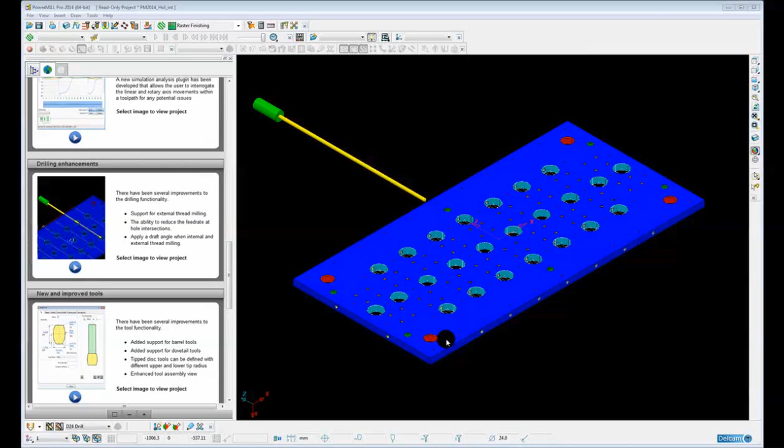There have been several enhancements to the drilling functionality in PowerMill 2014. Included in these enhancements are support for external thread milling using a thread milling tool, the ability now to apply draft to a threaded boss or a threaded hole, and finally the ability to reduce the feed rate when the drill breaks through an intersecting hole. This is particularly useful when gun drilling with small diameter, very long drills.

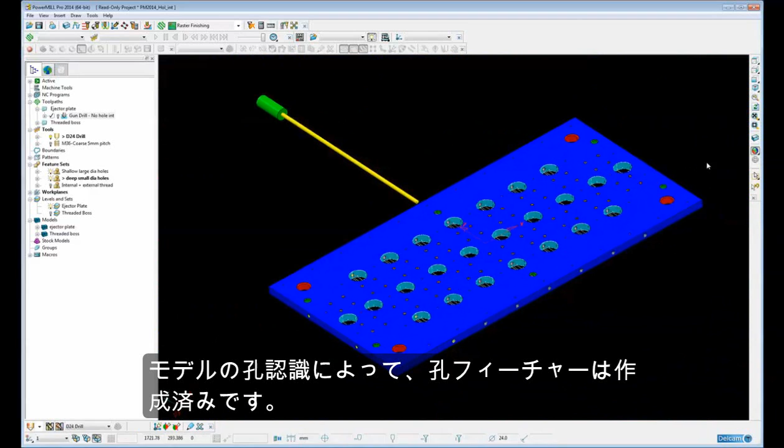Let's have a look at this list of new functionality in this example project. First of all, we're going to look at varying the feed rate at hole intersections. So here we have an example of a mold tool plate, an ejector plate, and we have a series of holes, smaller holes that intersect larger holes. We've already created the hole features by simply recognizing the holes in the model.

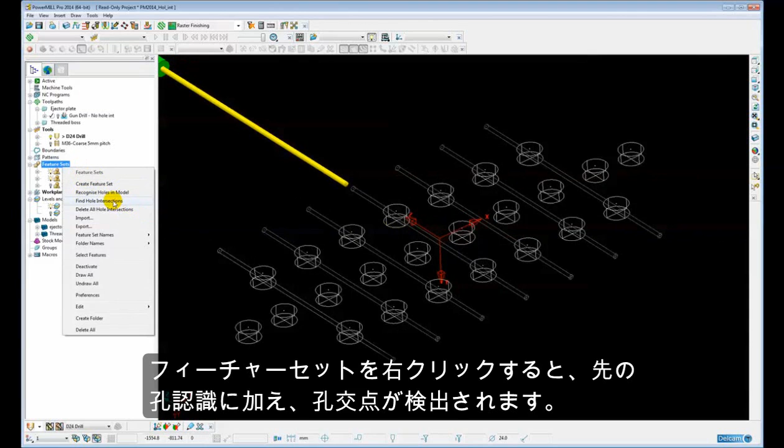Now, before we can apply the varying feed rate at the hole intersections, we need to find all intersections of all holes in PowerMill. This is a simple operation. We simply right click on the feature set. In addition to where we have recognize holes in model, we also have find hole intersections. So this will scan through all the holes and identify and display all the hole intersections. So here we can see the hole features are displayed with the hole intersections.

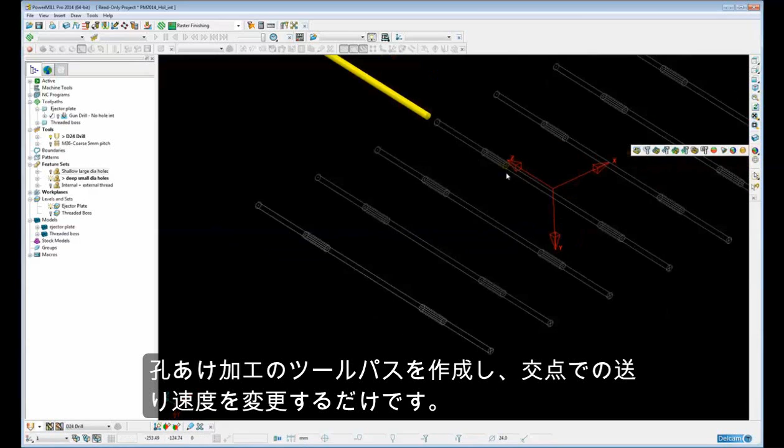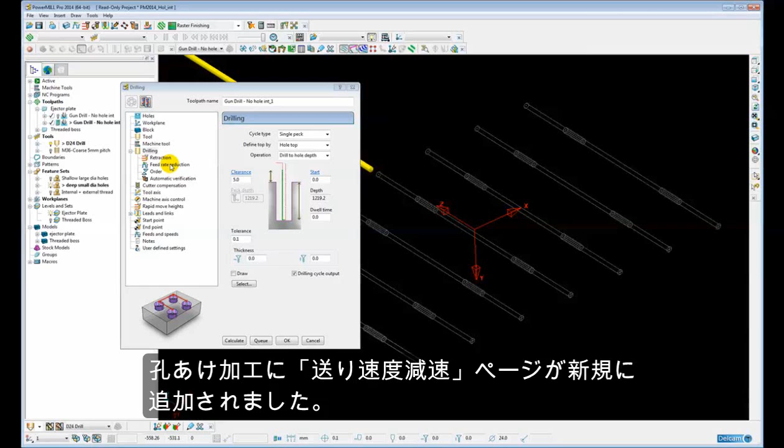So now it's simply a case of creating our drilling toolpath and activating the various feed rates at the intersection points. So I have a toolpath already created. If I go to settings, simply clone that toolpath. So just to show you how we vary the hole feed rates, we're going to create a single peck, drill hole to depth. Now you'll notice there's a new page on the drilling form called feed rate reduction.

So we're going to reduce the feed rate at hole intersections. Now I want the feed rate to be fully reduced at least 5 millimeters before the actual intersection of the hole, and I want the overall distance for the feed rate reduction to start to be, say, 20 millimeters. So from 20 millimeters to 5 millimeters, that's when the feed rate will be reduced, and I want to do that in 4 steps.

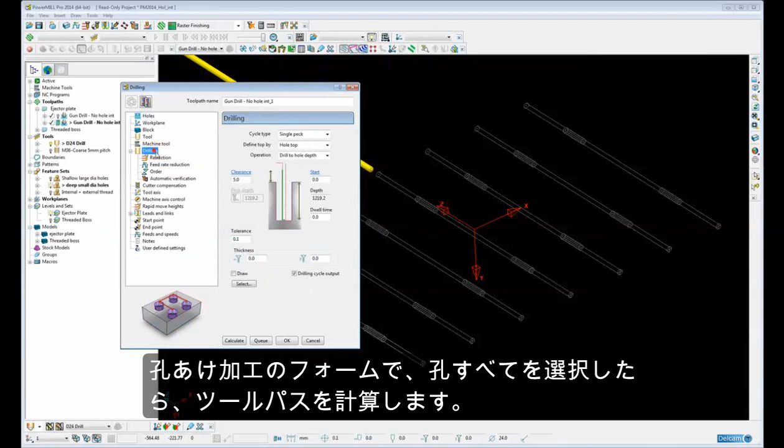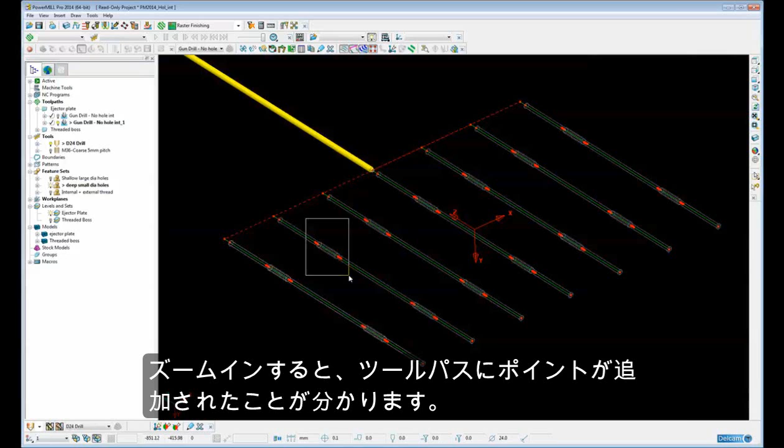And I want the final feed rate to be 30% of the general feed rate, and I want the spindle speed to be 50% of the general spindle speed. So if we go back to our drilling form and select all our holes, and then simply calculate the toolpath. So obviously the toolpath doesn't look any different until we switch on the draw points. And then if we zoom in, we can see it's added in extra points within the toolpath.

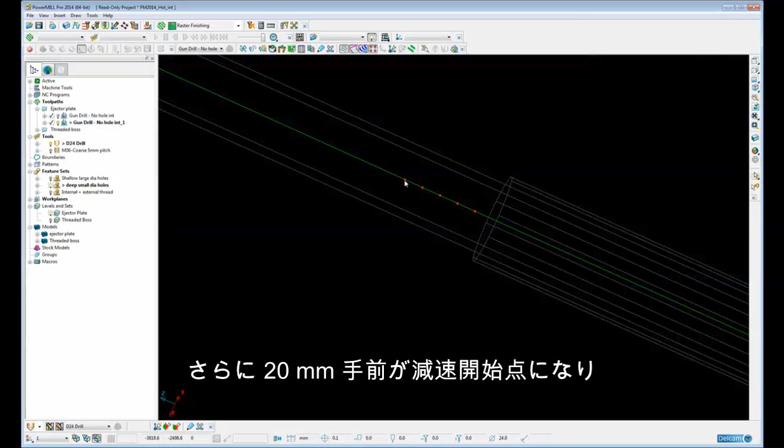So here we see at 5 millimeters before the intersection, the feed rate will be fully reduced, and an extra 20 millimeters on top of the 5 millimeters is when the feed rate will start to be reduced, and the feed rate has been reduced in 4 increments. If we want to, we can use the drawing option, draw feeds, and then we can see the exact feed rates that are going to be used. So our general feed rate is 1000, and we drop down to 30%, which is 300.

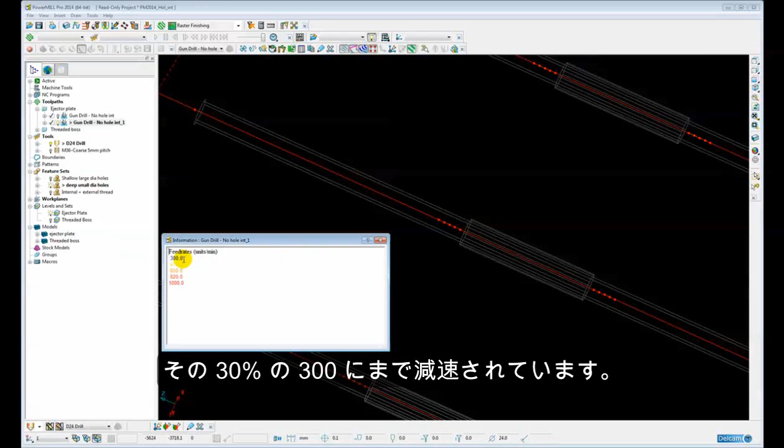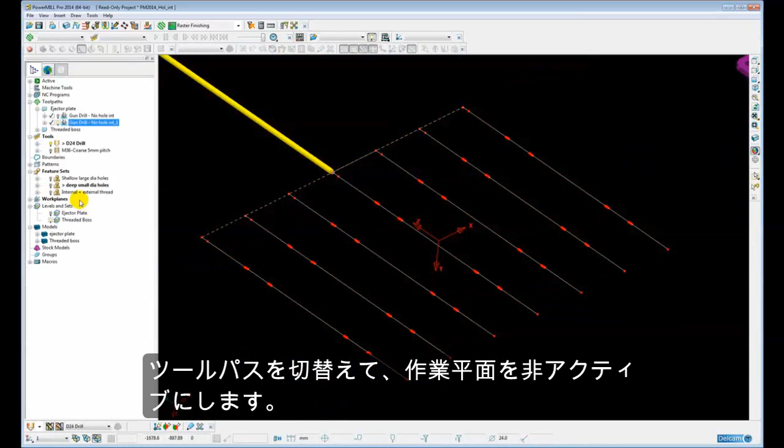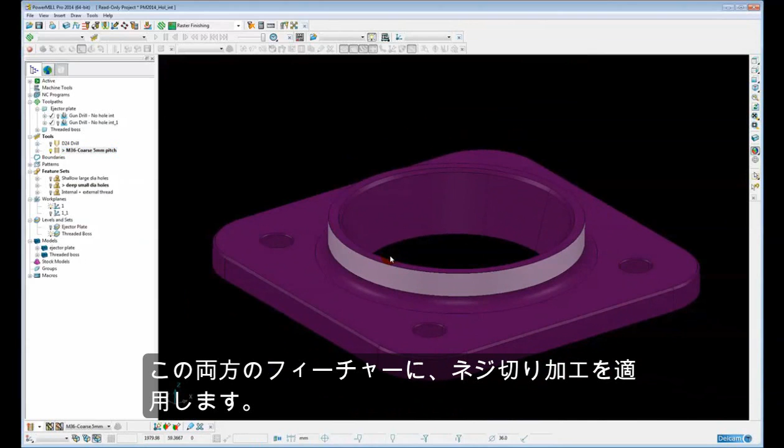The second and third new drilling enhancements involve thread milling. So here we have a second part. Just switch off the toolpath. Deactivate our work plane. So we have a simple plate with a tapered internal hole and an external boss. So we're going to apply a thread milling operation to both of these features.

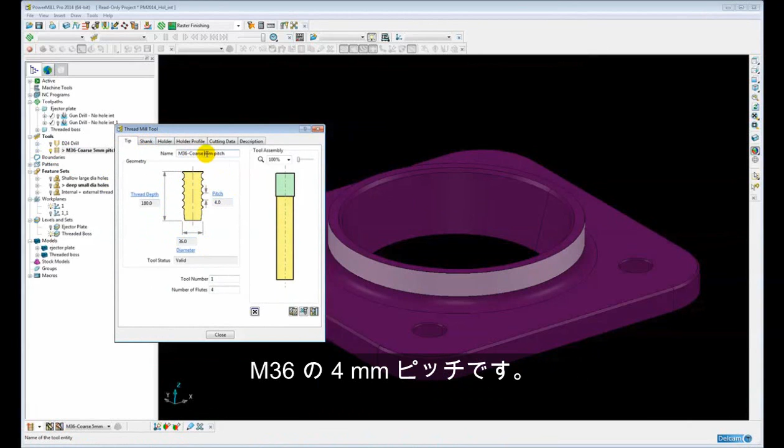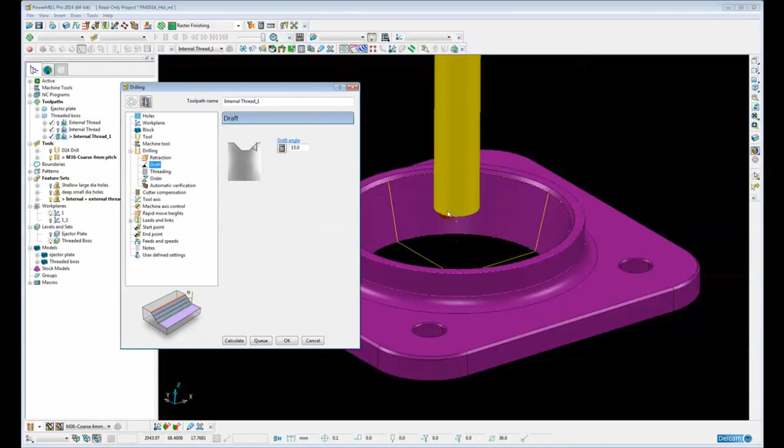First we need to create a thread milling tool. Now I have a tool already created. So it's a thread milling tool with a diameter 36 with a 4mm pitch. So it's M36 with coarse 4mm pitch. I have a toolpath already created to save time. Let's just clone that toolpath. So it's a thread milling operation. And the new feature for 2014 is the ability now to apply draft to these threaded holes. So here we can see it's picked up the draft angle automatically from the hole feature.

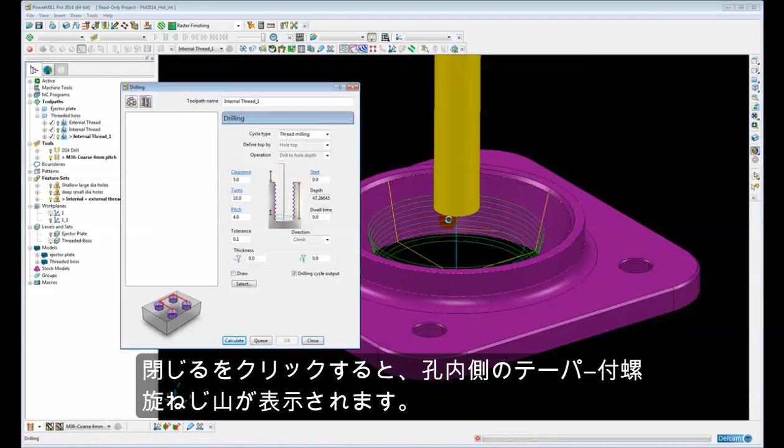We're going to do a number of passes, right hand thread with an angle lead in, 4mm pitch, and we're going to do 10 turns and then calculate. Close. So there we can see the tapered helical thread for the internal hole.

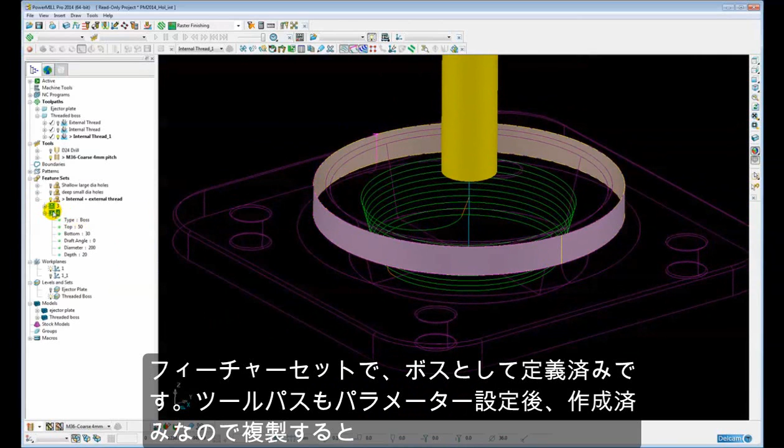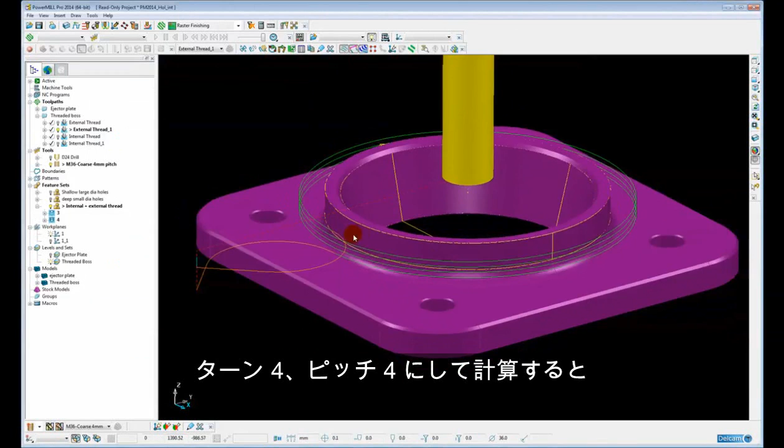To do the thread milling on the external boss, it needs to be defined as a circular boss, not as a hole, obviously. So I already have that defined in my feature set as a boss. And again, I have a toolpath pre-created with all the parameters saved, so I'm going to clone that. And then there's a new type of drilling cycle called external thread. This is new for 2014. And again, it allows us to use a draft angle if we have a draft angle. So number of turns 4, pitch 4, and then calculate. So there we have our external thread milling toolpath.